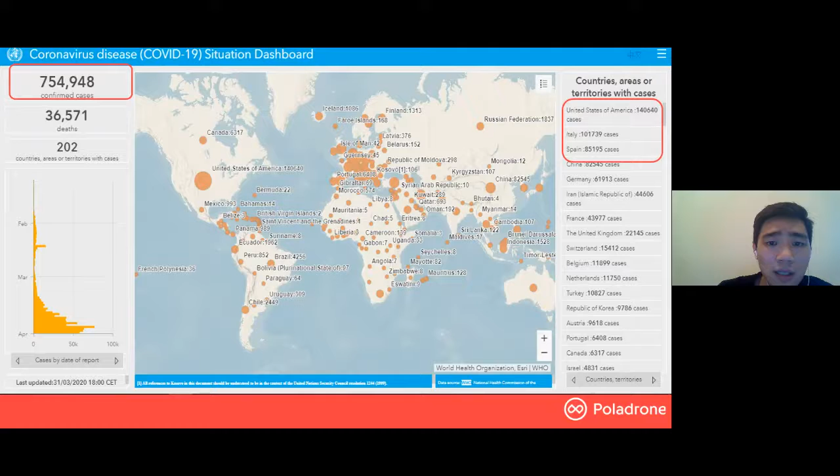So we can see the seriousness of the COVID-19 outbreak at this moment. Everyone, please bear in mind that we need to stay at home and stay safe to do some prevention for this outbreak. After seeing this worldwide map, we will zoom into Malaysia, looking at the COVID-19 outbreak timeline.

Confirmed cases as of now are 2,908. I will show the timeline of how it happened in Malaysia, starting from January 25th, when the first case of COVID-19 was found. On January 27th, our government suspended all immigrants from Wuhan and Hubei. On February 10, 18 cases were recorded, and the government found that case number 26 was a super spreader for confirmed cases.

So we can see from January 25th to April 1, the cases have been increasing more and more. But it seems like at the end of March, the cases started going down a bit. We hope the cases will get lesser and lesser, and eventually all patients will be recovered and back home. So this is some of the timeline of the Malaysian COVID-19 outbreak.

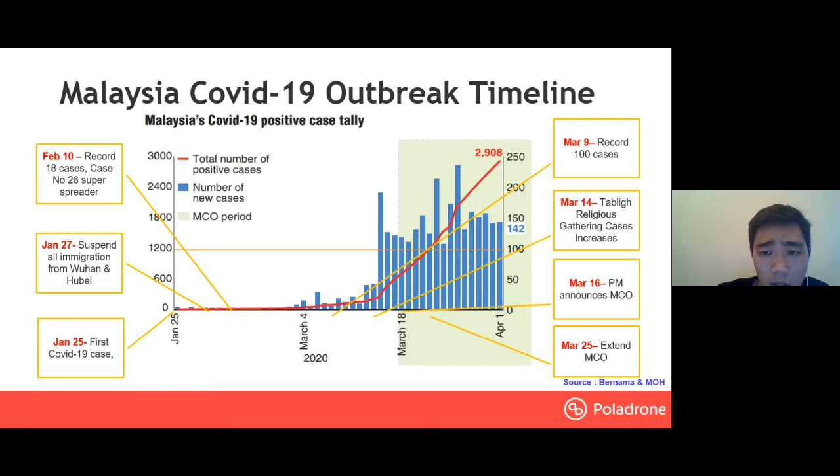Next, we're going into the next slide - what actions and precautions are taken by the Malaysian government. Malaysia has gone into emergency response, including applying rapid remedial treatments, diagnosis, and isolation due to confirmed cases. Also, the Movement Control Order (MCO) has been applied, and businesses will be closed until 14th of April, except for essential businesses.

The government is also trying to ensure there's sufficient supply across Malaysia, including medical supply, food supply, and mask supply. There are many things the government is trying to do now to ensure sufficient supplies for the public. The challenges we will face after this emergency response is that businesses will have low business productivity.

This is due to the restrictions on business continuity. So when there's a stop of productivity, the income will be going low as well.

There's also a risk of the virus spreading through close contact. That's why the government has restricted people from gathering and going into crowded places, because the virus can spread easily through close contact with each other.

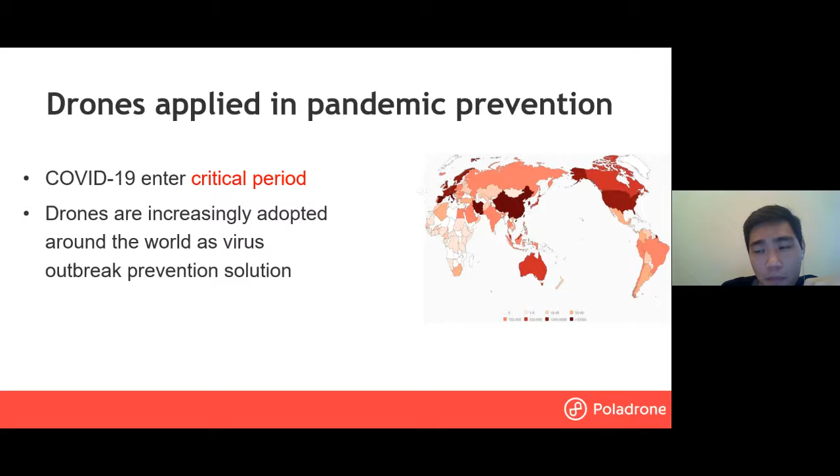Now I'm going to talk about scenarios and solutions. We have two solutions: the first is proven solutions, and the second is experimental solutions.

Before I enter the solutions, I assume there are some beginners with drones here, so I'm going to talk about the methodology behind the drone and what we call UAS solutions.

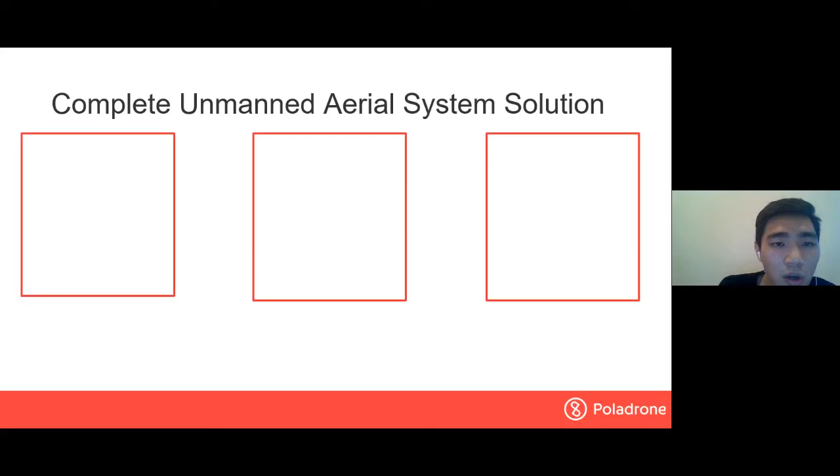They have complete unmanned aerial vehicle, unmanned aerial system solutions, which include 4 parts. The first part is that we need to have a platform, referring to our drones, which is basically hardware that we use to fly.

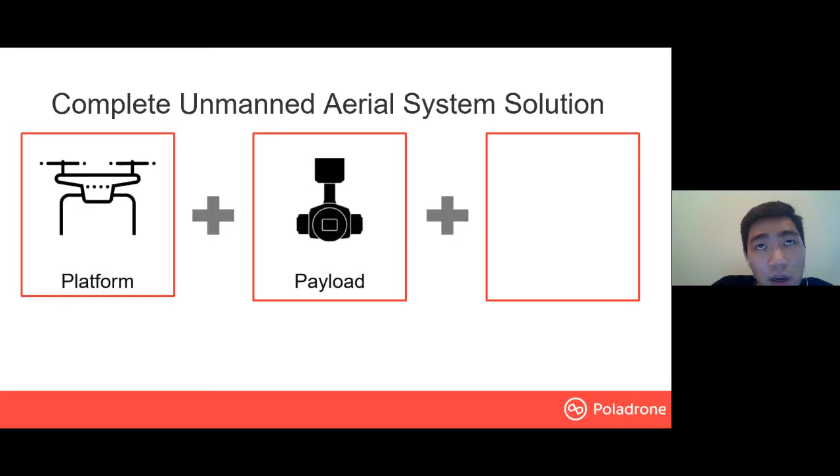The second part we'll talk about is payload. With the drone itself, it will only fly in the sky, but with the payload, it can help capture data on the ground. Normally our payload refers to cameras, but it can be other things as well, like LiDAR sensors or speakers. Yeah, it can be many things.

After having the platform and the payload, we need the third thing, what we call the software. The software part is useful to help you analyze the data and back everything up. In a simple way, we can take the platform as a body, the payload as our eye, and the software as our brain. Combining these three things, we call it a complete unmanned aerial system.

Most importantly, we need to have an operator, which we call a professional pilot, because we need pilot experience to fly the drones and capture the data correctly. So for those not familiar with drones, here is the chance to learn the new things: what is a complete unmanned aerial system solution.

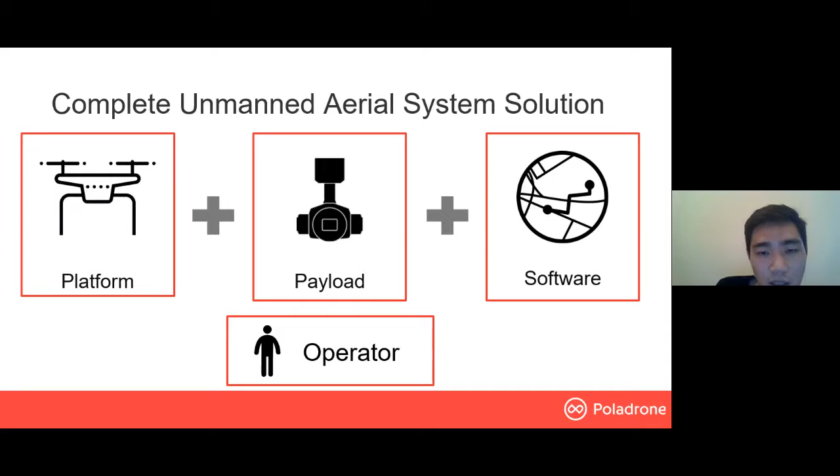After talking about this, I will start introducing our solution. For the virus outbreak prevention solution, we go into 2 parts: first is the proven drone solutions, and second is the experimental drone solutions. Both solutions will be used in different areas and for different purposes. I will explain it one by one in the next few slides.

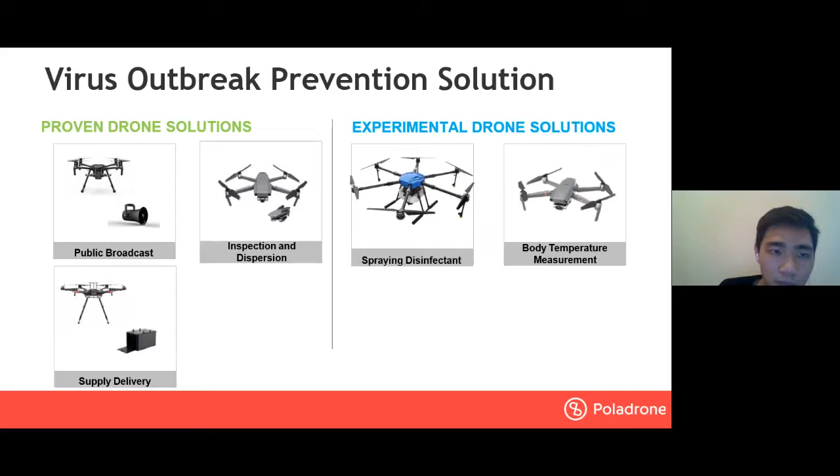We say there's a proven drone solution because it's the solution that has actually been deployed by the public for public safety officially around the world, and also for prevention. So it's already proven by DJI itself and other teams who are using the drone.

So the first solution I'm going to talk about is using the drone as a public broadcast. As we know, drones can be attached with a speaker as their payload, so the speaker can be used to communicate with the public very easily. Also, when using the speaker, you can convey antivirus education to the public without close contact.

So the enforcement body can use the drone to direct the message on the street or in the village. It can also travel a longer range - for this model, up to 7 to 8 km - to direct all the messages, and it will be more efficient compared to the traditional method. So this is the first method, what we call public broadcast using the drone.

Then the second method - we will use the drone as an inspection and dispersion equipment. What the drone can do is, when it flies high in the sky, it can help you do area inspections, especially when you want to monitor the road traffic conditions around the city.

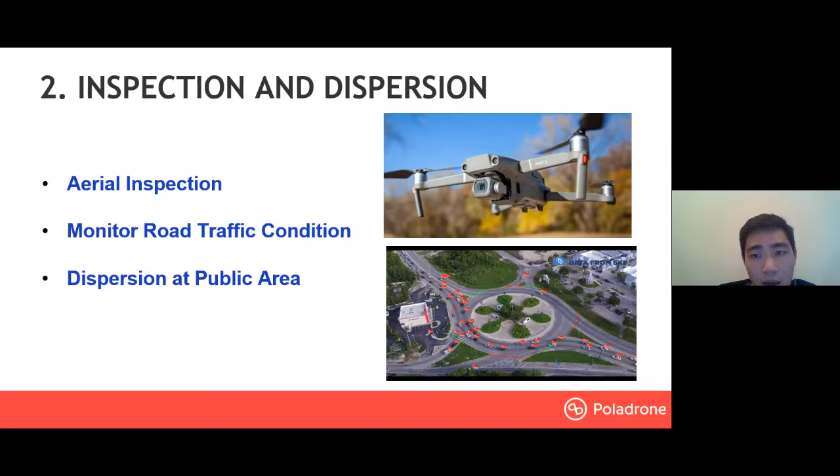So what kind of drone are we going to use in this solution? First, I'm going to introduce the Matrice 200 series version 2. As you see on the left hand side, this is the Matrice 200 series version 2 - this is an industry grade drone.

Normally they use it for tower inspections, solar panel inspections, and power line inspections. So this is the industry grade drone to perform these operations. We're going to use it in this case for inspection, dispersion, and broadcast. After having our Matrice 200 series drone, we will attach it with our payloads.

The payload will have 3 payloads introduced today. The first payload is a zoom camera called Z30, which has 30 times optical zoom. It can help you do the inspection with a closer, more detailed look using the zoom function - that's why we call it Z30, because it has 30 times optical zoom. This is the first payload we will introduce.

Now we enter the second payload, what we call the thermal camera XT2. With this payload, we have 2 cameras. The first is called the RGB camera - red, green, blue - which can capture normal pictures, just like our phone, giving us a normal view on the screen.

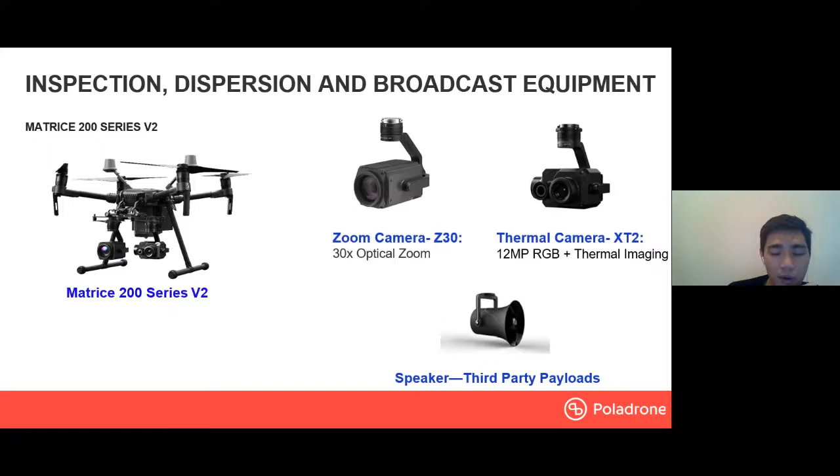Now we're going to introduce the second drone, which has the same function but is smaller in size - the Mavic 2 Enterprise series, very useful as a single-operator portable drone. With the Mavic 2 Enterprise series, we have 3 attachments. As you see at the bottom here, the first attachment is the speaker, which is very useful when we use it for broadcast.

And then we go for the second one, spotlight. Spotlight is a function that can give you a spotlight during the night time. It can help you do night inspections as well. And then the third attachment will be beacon. This beacon will help give visibility of your drone during night time when you fly at night. So this is the Mavic 2 Enterprise series.

So why do we use it? Because it's very easy to set up and also very portable. The weight of the Mavic 2 Enterprise series is less than 1 kg. And if you're taking the Mavic 2 Enterprise Dual, you get 2 cameras - one normal camera and one thermal camera. So it's very useful for night inspections.

And also with the speaker function, you can use it to communicate very well to the public. So this is the second drone we introduced for inspections, dispersion, and also broadcast.

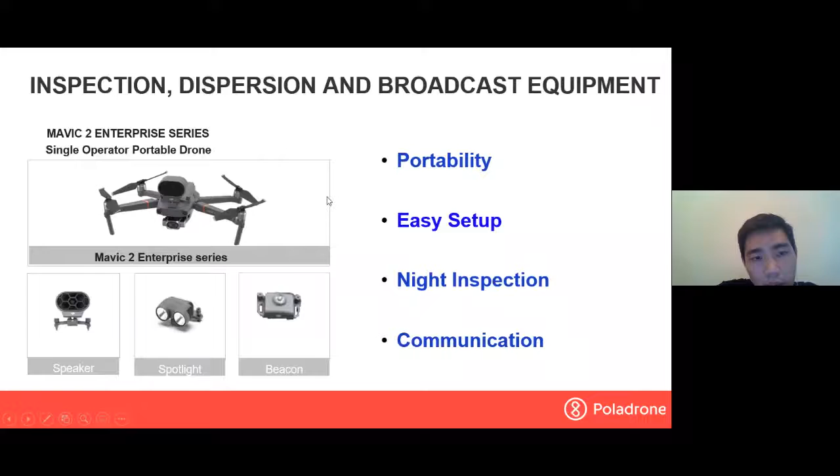So what we're going to use here is the Matrice 600 Pro, or another industry grade drone, attached with a supply box to deliver emergency supplies such as medical equipment or medical supply, which is less than 6 kg as suggested. It will be more efficient because you can skip road traffic by using the drone, and it helps avoid direct contact between people and the public. So you can deliver things within a shorter time with more efficient functions. This is the third solution we're introducing here.

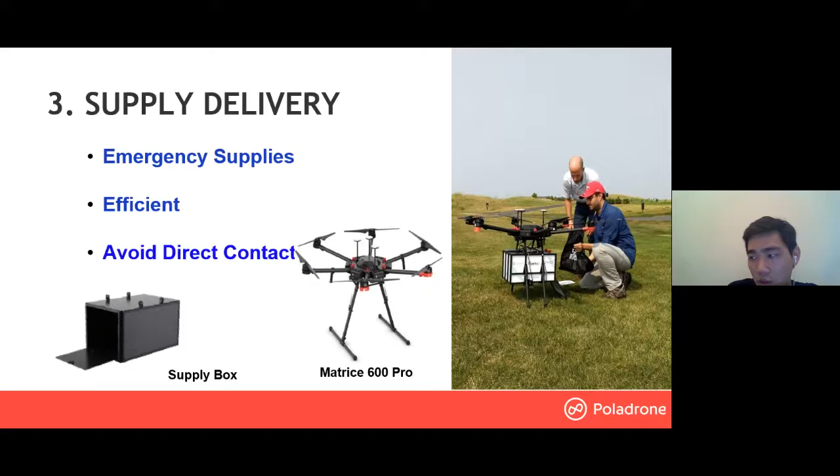Next, I'm going to talk about experimental drone solutions. Why do we say experimental drone solutions? Because these solutions are still under an experimental stage, so we cannot make any statement on the exact efficiency of these solutions.

So first, we're going to use the drone to take body temperature measurements. Basically, we use the thermal camera to identify potential infected persons and measure their body temperature. This helps enhance the safety distance between the enforcement body and the potential infected person. The estimated accuracy will be around plus minus 0.5 degrees Celsius.

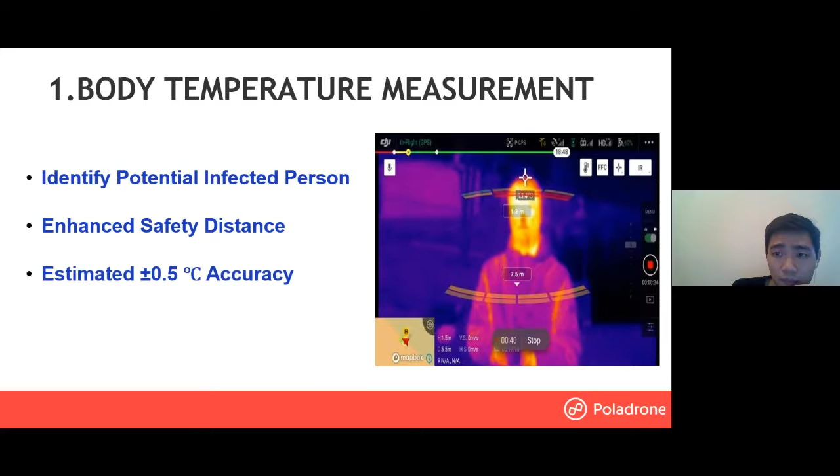So what kind of drone do we use here? We use a modified Mavic 2 Enterprise Dual. As I mentioned earlier, the Mavic 2 Enterprise Dual is for thermal imaging, using the FLIR camera. The DJI team in China has modified it by putting a cotton swab in front of it - as you can see in the first picture, there's a cotton swab in front.

So what's the cotton swab's function? Sticking a cotton swab on this drone helps improve the accuracy of measuring a person's temperature by acting as a reference point for calibrating the thermal imaging camera. In the second picture, you can see this cotton swab acting as a reference point for calibrating the thermal imaging camera. This helps reduce the margin of error to plus minus 0.5 degrees Celsius.

As I said, this is still an experimental solution introduced by DJI. Remember that calibration must be done - if not, the efficiency of the reading or measurement will not be accurate. So this is the first experimental solution introduced by DJI.

Now let us see the second experimental solution. I think there are a few interesting questions here. The first one someone asked: can the thermal camera do temperature scans on humans from an aerial view? Is it accurate enough?

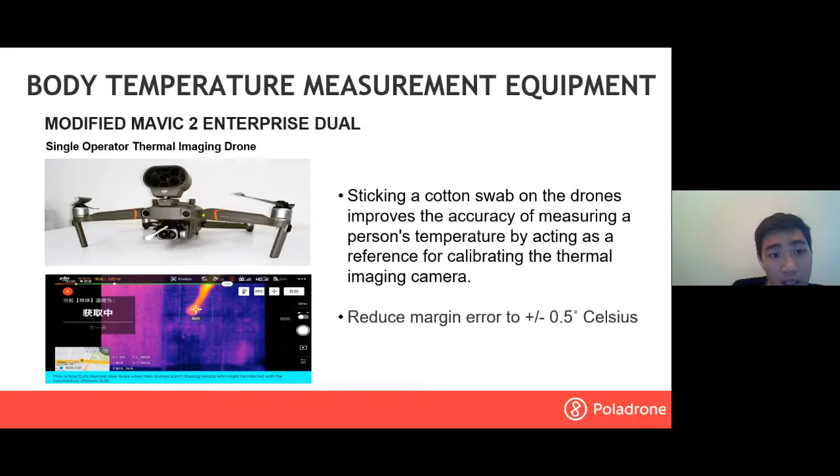So back to the topic. Now we will be entering the second solution, the experimental solution, as I mentioned earlier - using the drone to spray disinfectant. In China, the DJI agriculture team has used their agriculture drones to spray disinfectants around villages or streets in China.

So why did they do this? Because it can help ensure personnel safety without direct contact with the infected area, and it will be more highly efficient operations. With the drone's speed, it can cover more area compared to the traditional method. It also helps lower the operation risk, because without close direct contact in the infected area with COVID-19, it can help lower the operation risk for the enforcement body.

So this is the drone solution introduced by DJI in China. We also introduce our experimental solution using our own brand called Polar V16.

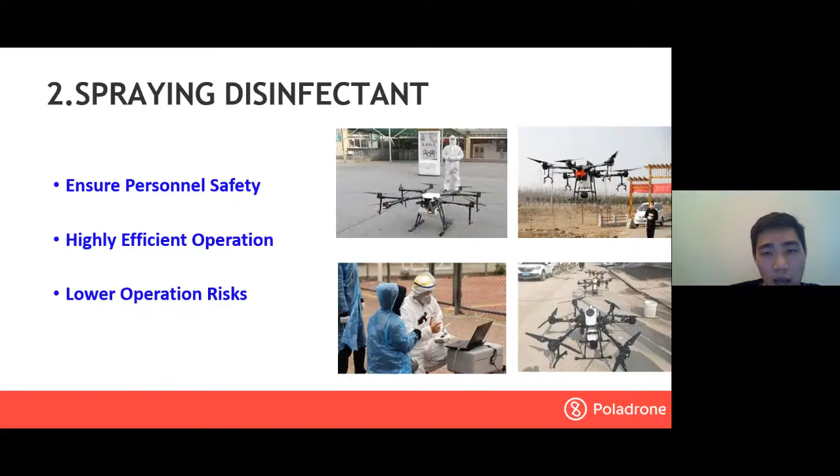As we saw earlier, the DJI team is using their agriculture spraying drones to do the disinfectant spraying. So we introduce our spraying drone as well, assembled locally and engineered by the Poladrone team and our team and our INT as well. Our spraying drone is called Polar V16X, and it can help do the same function to spray disinfectant.

What we need in this case is a set of intelligent batteries with chargers, so it can operate for full day operations. We will also add in chlorine or ethanol alcohol based disinfectant. With this complete set, it can do the spraying disinfection solution.

This drone also has obstacle avoidance sensors to help avoid obstacles and prevent crashes. This is the spraying disinfectant solution we introduced, called the spraying drone Polar V16.

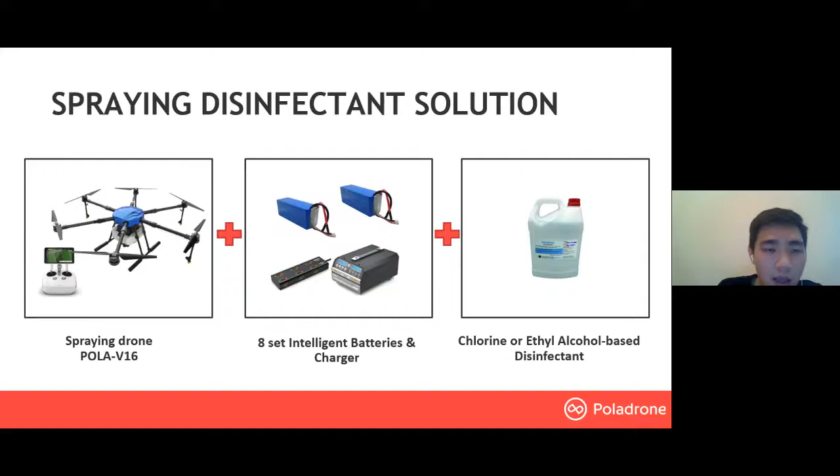Thanks Afiq for this question. So after that, I'm gonna talk about a case study that have applied drone solutions during the disease outbreak in different countries.

So the first case study is in China. In Shanghai, the police department has used drones as inspection and broadcast equipment. They used the Matrix 200 series and also Mavic 2 Enterprise series to inspect 22 apartments per day.

Case study 2, also in Shanghai. One apartment community has used the Mavic 2 Enterprise with a loudspeaker to do body temperature measurement. They will fly to the resident's home and measure within 2 to 3 meters. They successfully inspected 8 apartments per day using the Mavic 2 Enterprise Dual.